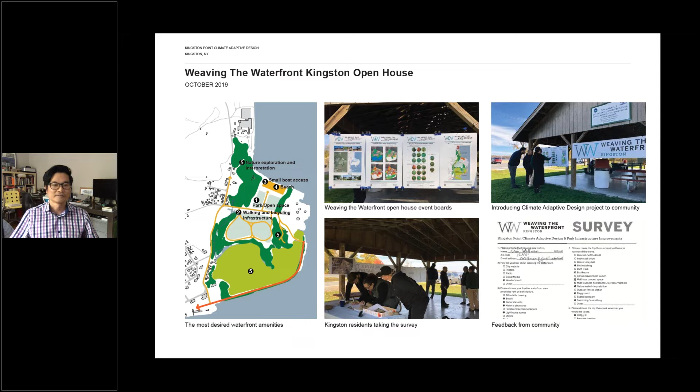This presentation is a continuation of the citywide Weaving the Waterfront Kingston open house we had in October last year. Many of you would also remember Cornell University's Climate Adaptive Design Kingston studio, where this project originated.

This is the projected sea level rise expected at Kingston Point based on the aggressive scenario at high tide. By 2050, some of the properties on North Street may get affected. By 2080, half of Kingston Point, along with its beach, is expected to go underwater.

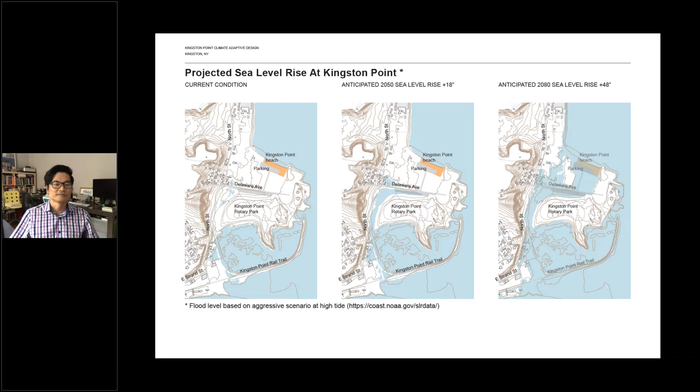Scenario 3 is called Peninsula with most intervention. Added extension of the high grounds in the front and embankment of Delaware Avenue in the back would protect the existing forest habitats and the properties on North Street, keeping the point as a peninsula.

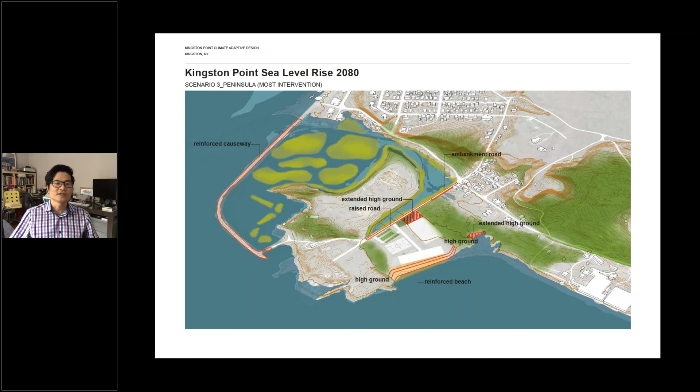Based on the study of these three scenarios, we concluded that the reinforcement and improvements of the Kingston Point Beach can have the most benefits to mitigate the sea level rise, both for the community and the area itself. The existing conditions of the beach show high grounds on both sides of the beach, with the existing programs of swimming, beach volleyball, parking, and forest habitats.

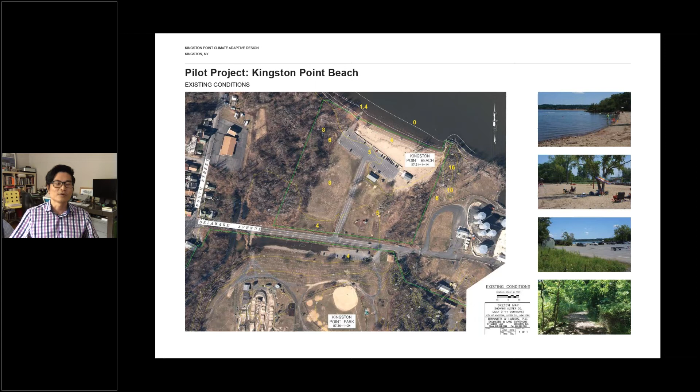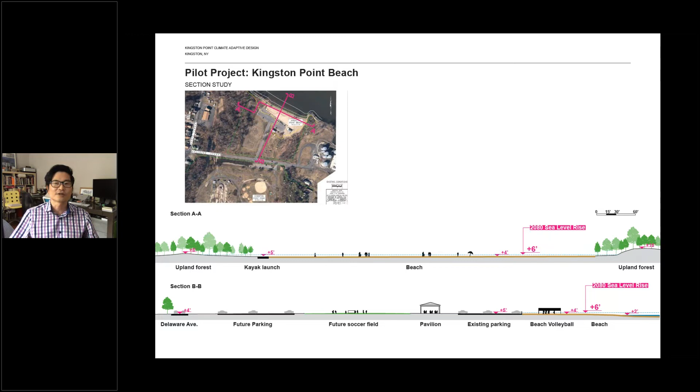This section study shows how the sea level rise by 2080 can be mitigated by connecting the two high grounds of upland forests on both sides of the beach.

The second design toolkit starts introducing bioengineering techniques. This can include living shorelines, vegetated berms, eco-concrete blocks, or habitat-creating living breakwaters.

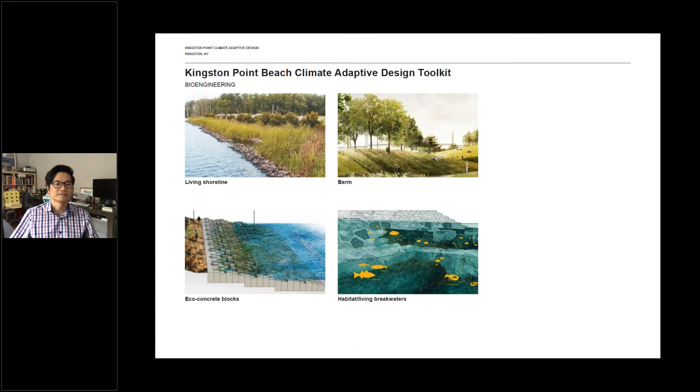This leads to three core design elements: beach on the low ground, hills and berms on the high ground, and habitats that connect the two.

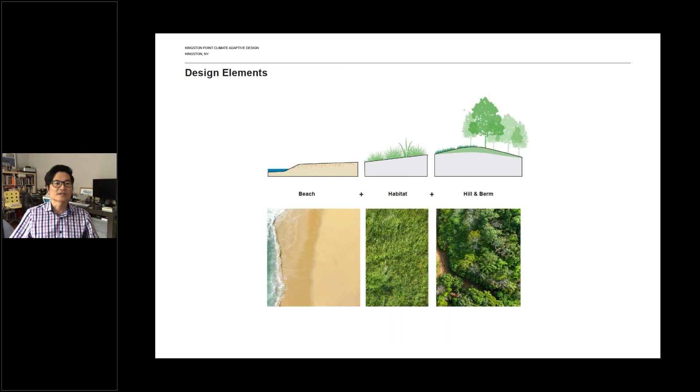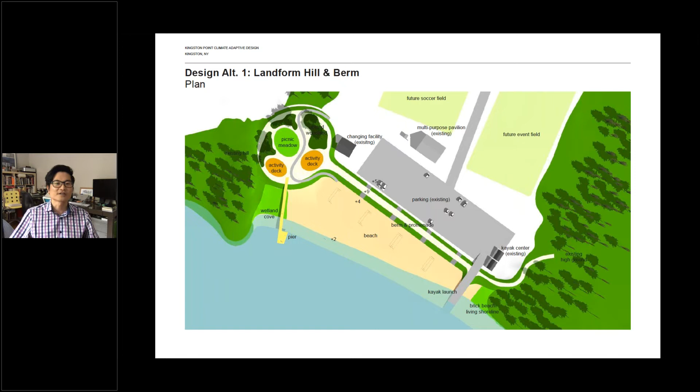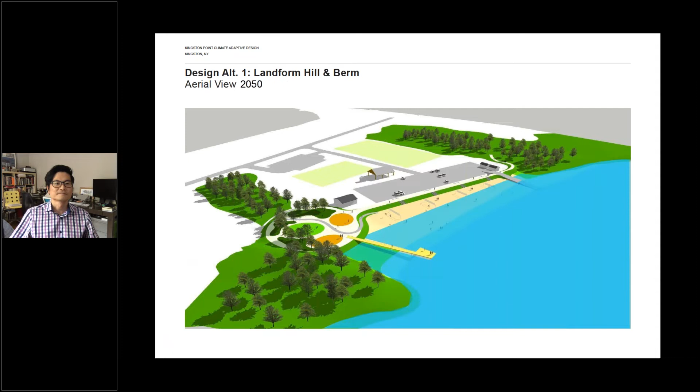By 2050, sea level rise will start claiming part of the beach area. By 2080, most of the beach will go underwater at high tide. The activity areas on the hill and the recreational areas behind the berm will stay protected.

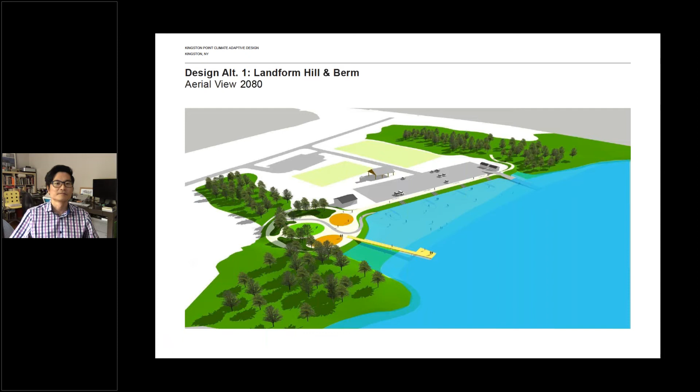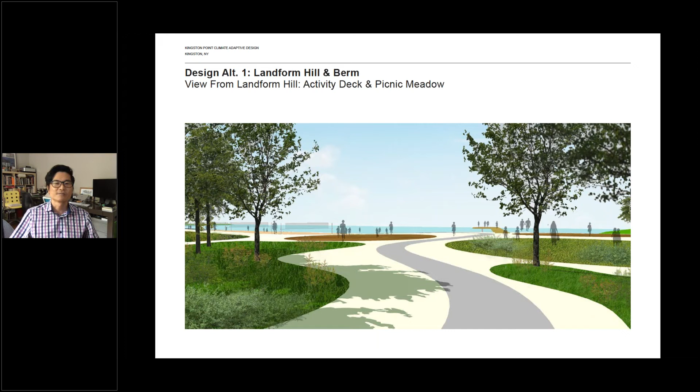As you get closer to the beach, you have an open view of the water and beach. The promenade on the planted berm extends the protection to the other side of the beach.

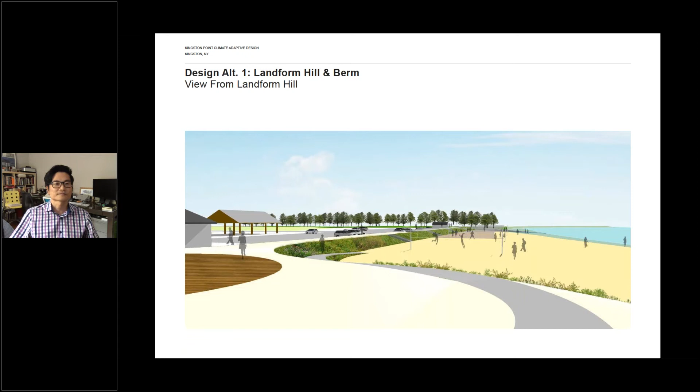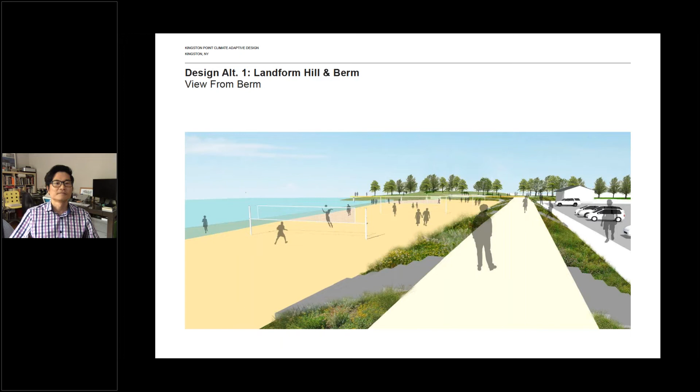The view of the beach and parking lot from the promenade berm shows how the flood protection works. The height of the vegetated berm is about 4 feet from the ground in the parking lot, so you can still see the beach from the parking.

Design alternative 2 is called linear terraces. Linear terraces are held up by constructed edges. It starts out as narrow planted terraces on one end and becomes generously sized beach terraces on the other end. Each terrace steps up and functions as flood barrier along the beach.

Similar to alternative one, Wetland Cove and Brick Beach living shoreline on both ends connect the beach to the larger ecosystems.

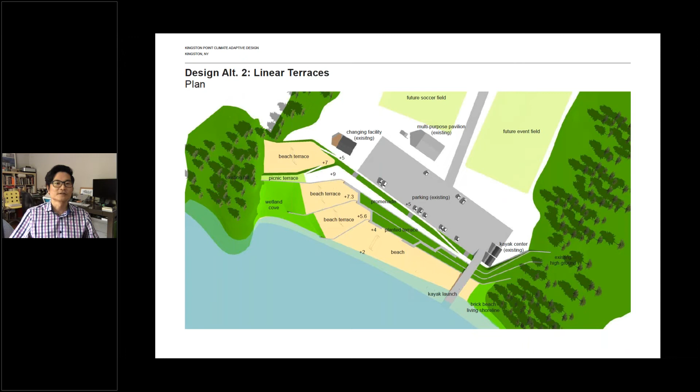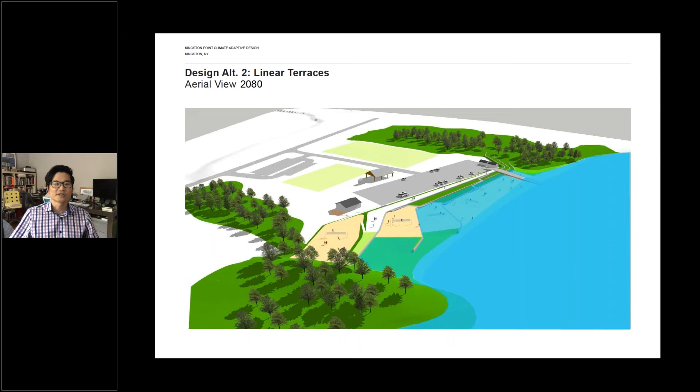By 2050, the beach at the lowest level will go underwater, but the raised terrace beaches will remain protected. By 2080, the first tier raised terrace will go underwater at high tide, leaving the top tier beach terrace still protected and functioning.

Constructed edges of the linear terraces take up smaller footprints, and this allows more generous program spaces on each terrace. Paired with constructed hard edges, planted terraces will absorb more flood water and stabilize the ground more effectively when interacting with floods.

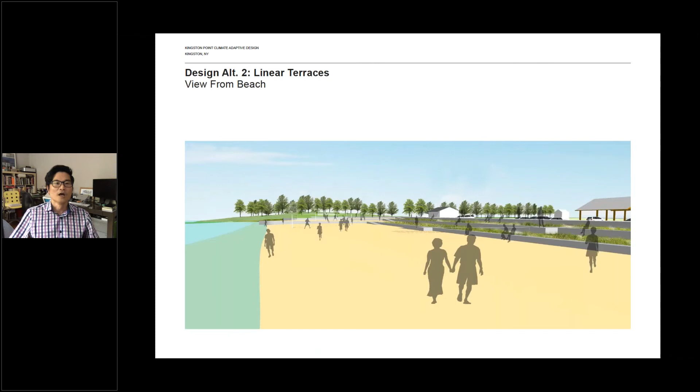The view from the beach shows how the linear terraces step up to form an effective flood barrier. Terrace edges function as a grandstand on the beach for people to sit on and enjoy the water view of the Hudson. Gentle 5% accessible ramps, which do not require handrails, connect between the terraces.

The view from the upper terrace promenade shows how the planted terraces with native riverine plants transition into beach terraces, large enough to accommodate beach volleyball courts.

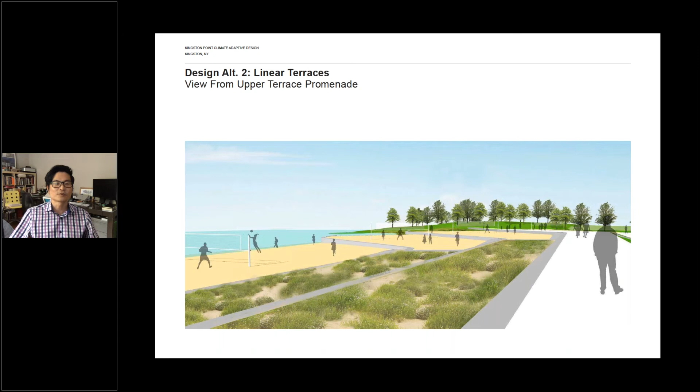Access to the beach from the parking lot is provided by a combination of gentle 5% accessible ramps and direct stairs. Views to the beach are maintained over the raised linear terraces.

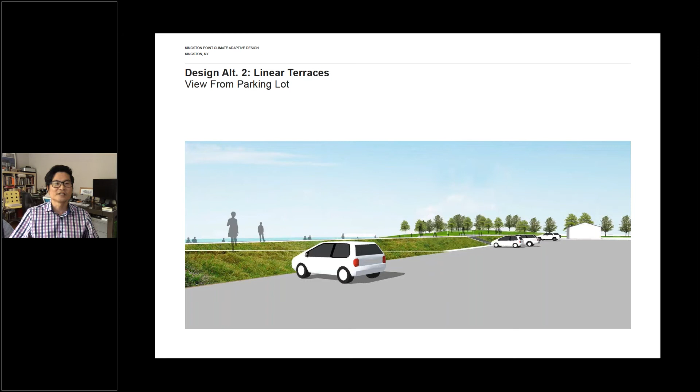The third design alternative is called stacked terraces. This allows the most diversified programming opportunities. Flood protection is provided through a series of stepping-up stacked terraces built with constructed edges.

Terraces are in various shapes, sizes, and heights, and provide a range of programming opportunities, such as beach terrace, activity terrace, garden terrace, picnic terrace, lookout terrace, and grandstand.

On one end of the beach, stacks of rocks with plantings create a rock outcrop terrace that connects to the existing rock outcrops on the shoreline. On the other end, a living shoreline connects to the larger habitat ecosystems.

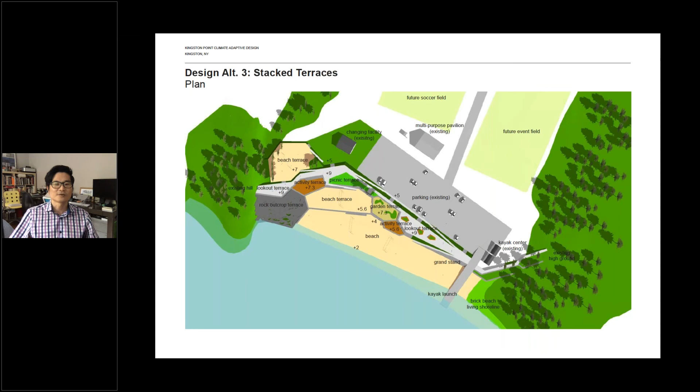Aerial view of the present-day waterline shows how the stacked terraces provide diverse program opportunities while preparing for future flood protection. The terraces are in geometric forms, but arranged in a random and organic way. This allows shapes and programming of the terraces to be flexible if certain programs are preferred over others.

As the sea level rises by 2050, the beach at the lowest level will go underwater. Articulation of the terrace edges will define a new shoreline.

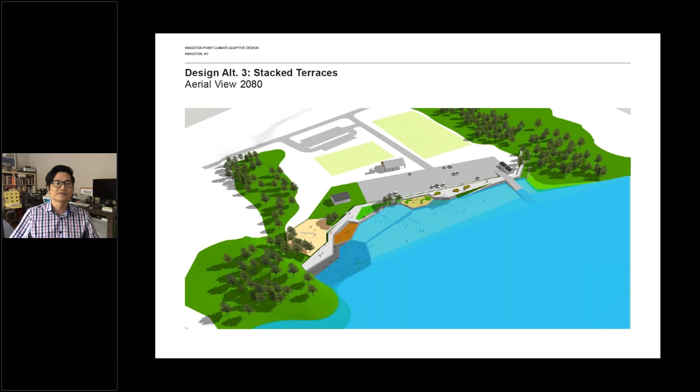By 2080, as the water level keeps rising, the lower level terraces will go underwater at high tide and redefine the shoreline in a different way. The programs on the upper terraces will remain active while providing flood barrier function.

View from the upper lookout terraces shows how the terraces are stacked up at varying heights, creating exciting program spaces. View from the beach shows a range of diverse experiences, both visually and experientially, from grandstand to vegetated slope to various program terraces.

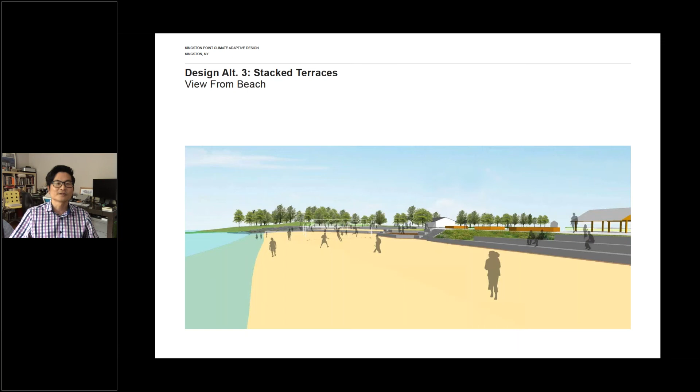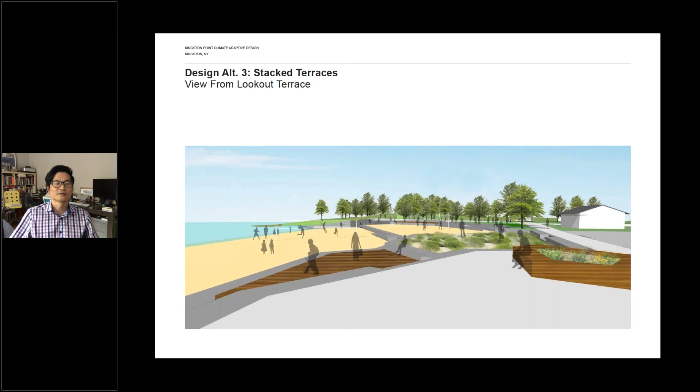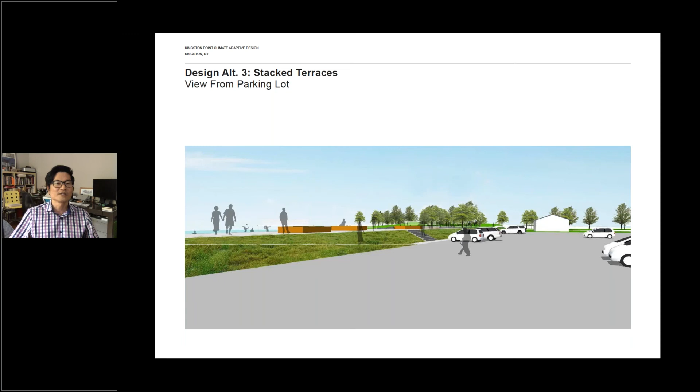Access from the parking lot is provided by a combination of gentle 5% ramps and direct stairs, with a view of the beach maintained over the stacked terraces.

In comparison of the three design alternatives, each has its own merits and advantages. Alternative 1, Landform Hill and berm, relies on earthworks and plantings. It is more cost-effective and ecological compared to hard-engineered solutions, but it may add less protection to the beach area.

Alternative 2, linear terraces, relies on a good combination of hard engineering and habitat creation. Its linear geometry allows generous but simpler programming spaces.

Alternative 3, stacked terraces, provides the most diversified program opportunities with exciting and varied experiences and spaces, perhaps at an added construction cost. So, which one would be your favorite? We would like to hear from you to select the best design alternative to move forward to the next step.

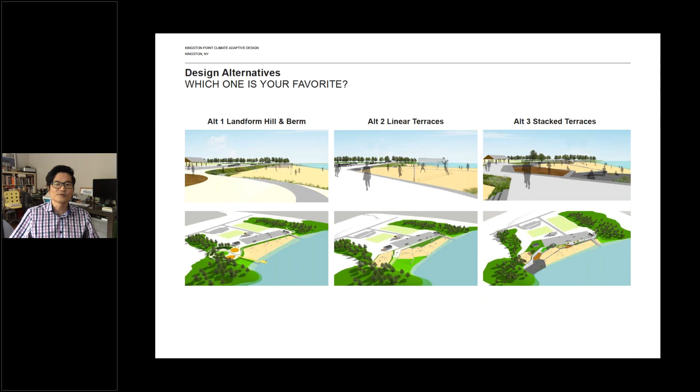Before concluding this presentation, I want to give you an overview of where we are in the overall process. We started in August 2019 with a project kickoff and analysis.

We held a Weaving the Waterfront open house in October 2019 and completed the analysis in December 2019. Based on the community input from the open house, we completed the overall framework plan in February 2020.

Today, we are at the end of the preliminary design alternatives phase to choose the best direction for the final design. Based on your input, we will develop the final preliminary design by September 2020.

Future phases will include construction documentation and the permitting process, anticipated in 2021, followed by target construction of the pilot project in 2022.